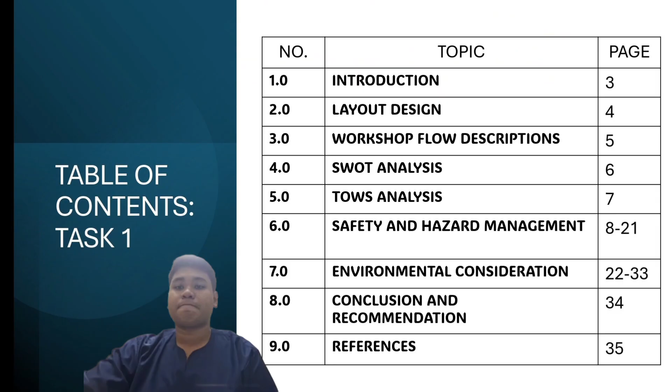So this is our table of content.

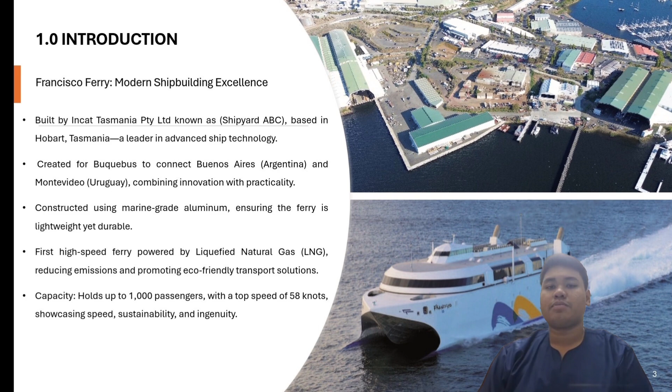For introduction, Francisco Ferry, a modern shipbuilding excellence built by Shipyard ABC in Tasmania, is innovative and efficient. It's powered by LNG, making it eco-friendly. It's also designed to connect Buenos Aires and Montevideo. It can carry up to 1,000 passengers and reach 58 knots.

Next is layout design. The shipyard layout is strategic to ensure smooth workflow. Each section, like the blasting and fabrication areas, is arranged for efficiency and safety.

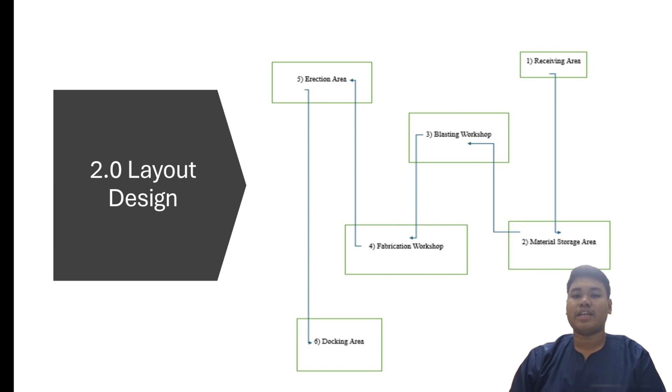Next, we move to workshop flow description. The shipyard workflow is divided into key areas. The first one is the blasting workshop, which is to clean metal for strength and safety. The second one is the fabrication workshop. It uses machines like cutters and welders for speed and accuracy, for example cutting shapes and weld methods.

Number 3 is the erection bay, which is for assembling large parts using cranes. And the last one is the docking area, which is the place for final testing and touch-ups before launch.

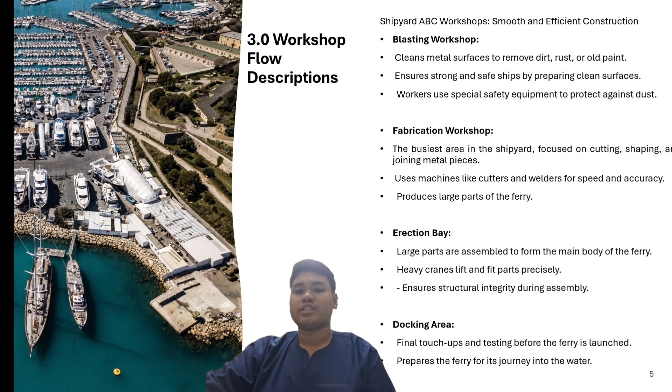We move to SWOT analysis 4.0. For strength, advanced technology like LNG powered ferries, and skilled workforce with efficient processes. For weakness, high initial cost for advanced equipment and dependency on specific skill level. For opportunity, growing demand for eco-friendly ships and potential for international collaboration. For threats, competition from global shipyards and stringent environmental regulations.

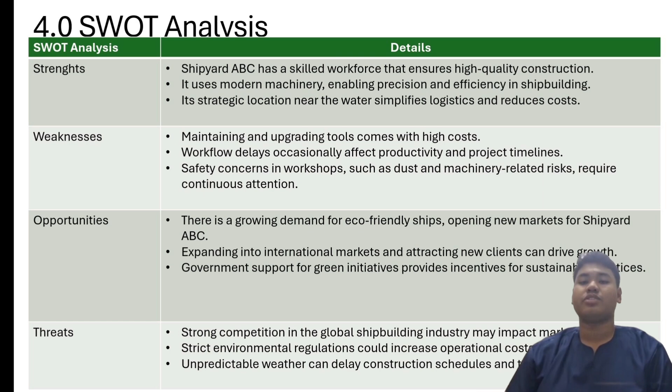Next is TOWS analysis. The first one is threats-opportunities: use advanced technology to tap into the eco-friendly ship market. Second one is strength-threat: leverage expertise to stay ahead of competition despite regulation.

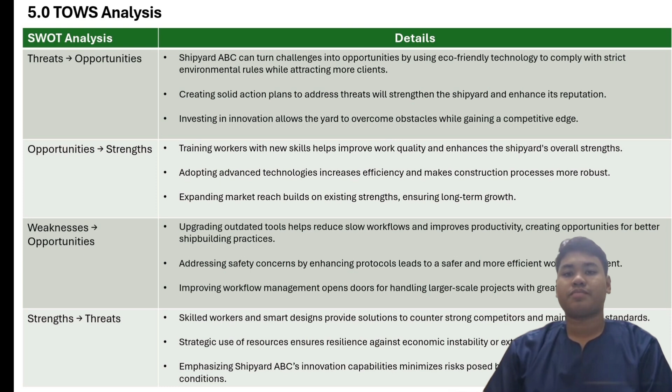Number 3 is weakness-opportunity: seek international funding to offset high costs. And the last one is strength-weakness: invest in training programs to reduce dependency on specific skill level.

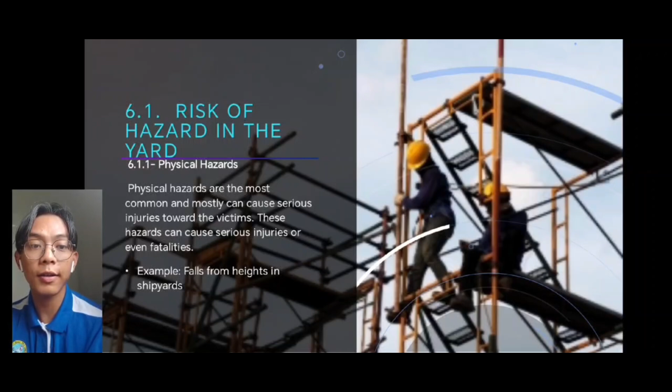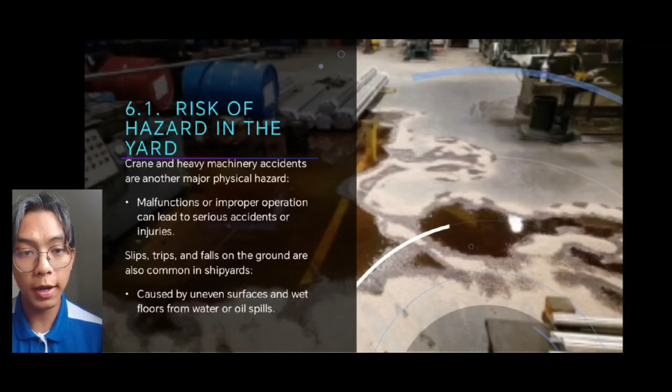The next one is slips, trips, and falls on the ground that can be caused by uneven surfaces and wet floors from water or oil spills.

Next one is chemical hazards. Chemical hazards in shipyards can cause immediate injuries, as an example burns and respiratory irritations, that can cause long-term health problems such as cancer and lung disease. Next is chemical risk that includes exposure to hazardous substances, as an example asbestos, solvents, welding fumes, and paint that contains lead or other toxic materials.

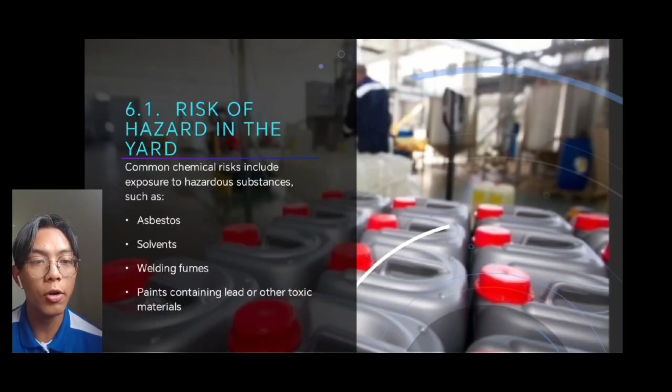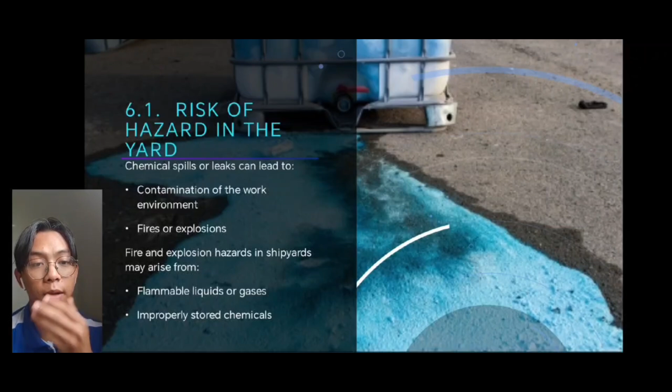Chemical spills or leaks can lead to contamination of the work environment or fire or explosion. Fire and explosion hazards could be caused by flammable liquids or gases, or improperly stored chemicals.

Biological hazards are less common but still pose health risks, including mold and fungi. Shipyards, as we know, handle wet materials, so that's how mold and fungi could be a risk of hazard in shipyards. The humid environment is also prone to biological growth, and these hazards could affect long-term exposure, which may include respiratory disorders and other chronic health issues.

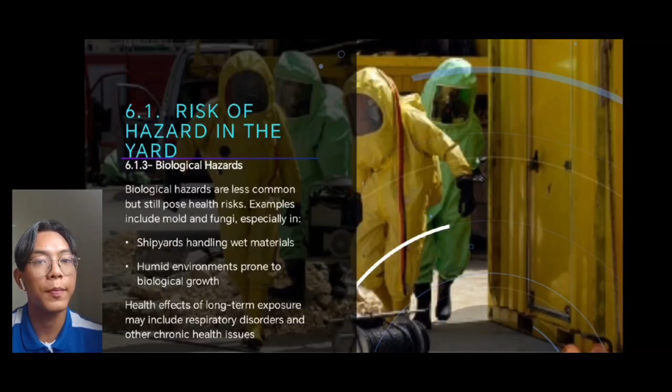For proper safety measures, use PPE. PPE is essential to minimize injury to workers. Workers are encouraged to wear hard hats, safety boots, safety glasses, and safety gloves. For chemical or fume exposure, workers should use respirators or face masks, which could help workers minimize the inhalation of hazardous substances and protect long-term health.

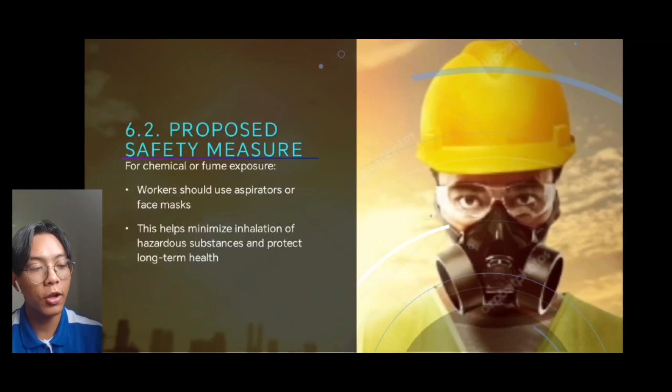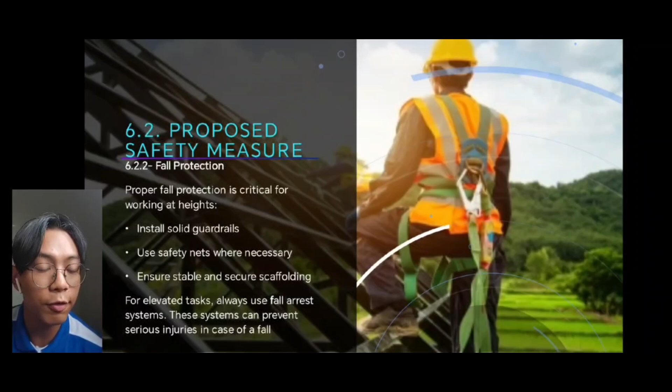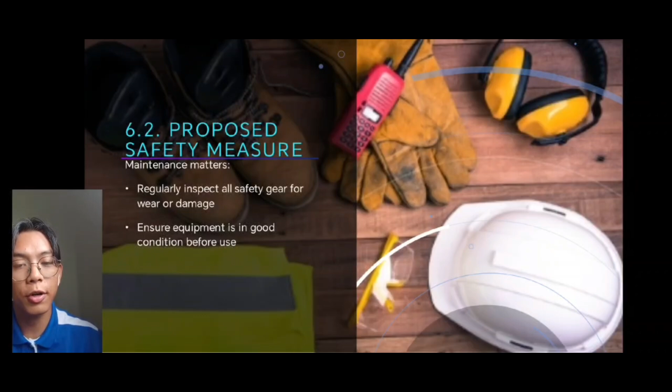For fall protection, companies should provide solid guardrails and safety nets where necessary, and ensure stable and secure scaffolding. For elevated tasks, workers should use a fall arrest system that can prevent serious injuries in case of falling from height. Maintenance matters should be done by regularly inspecting all safety gear for wear or damage, ensuring equipment is in good condition before being used by workers.

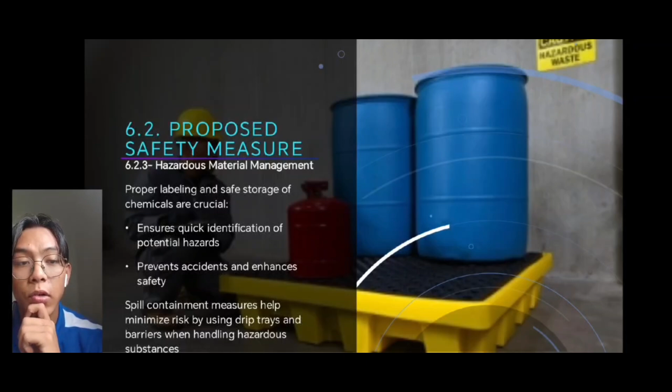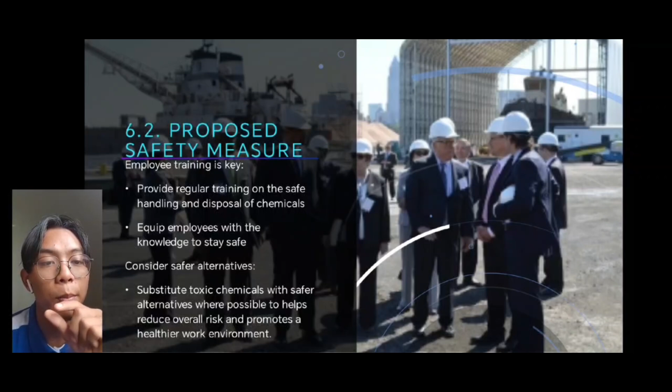Chemicals need to be properly labeled and stored safely to ensure quick identification of potential hazards and to prevent accidents and enhance safety. Spill containment measures help minimize risk by using drip trays and barriers when handling hazardous substances. Employee training is key, providing regular training on the safe handling and disposal of chemicals, giving knowledge to employees to stay safe in the working environment and consider safer alternatives. Substitute toxic chemicals with safer alternatives where possible to help reduce overall risk and promote a healthier work environment.

The next one is environmental consideration. For eco-friendly practices in ferry construction, the company should use sustainable materials, because it can support environmental responsibility and efficiency by using recyclable materials such as aluminium and eco-certified composites. They should also enhance resource efficiency in large-scale projects.

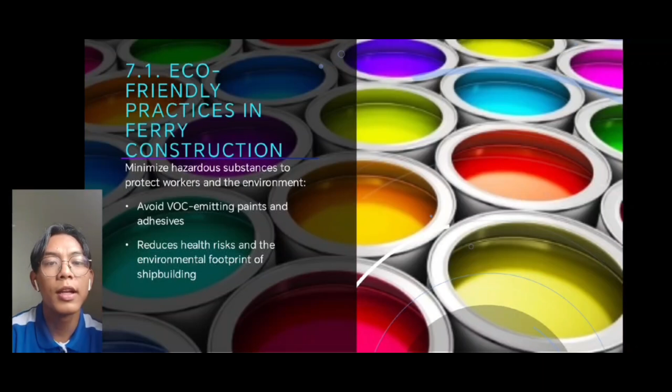For interior fittings, they should choose sustainably sourced wood to promote responsible material choices. They also need to minimize hazardous substances to protect workers and the environment, avoiding VOC emitting paints and adhesives to reduce health risks and the environmental footprint of shipbuilding. By maintaining eco-conscious shipyard practices, they can transition to renewable energy sources in the shipyard.

For example, use solar or wind power to reduce carbon footprint and to promote material recycling and reuse. This also can help cut down on waste, which conserves valuable resources during construction.

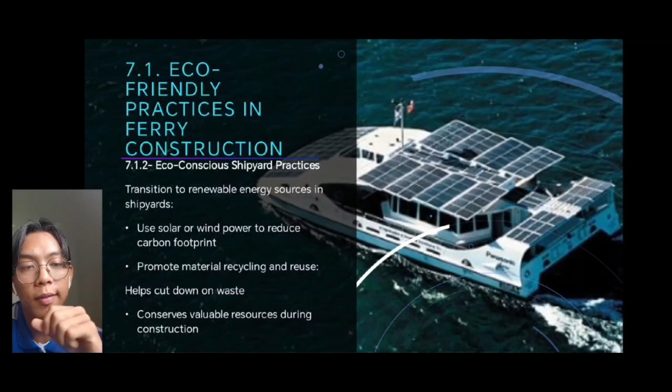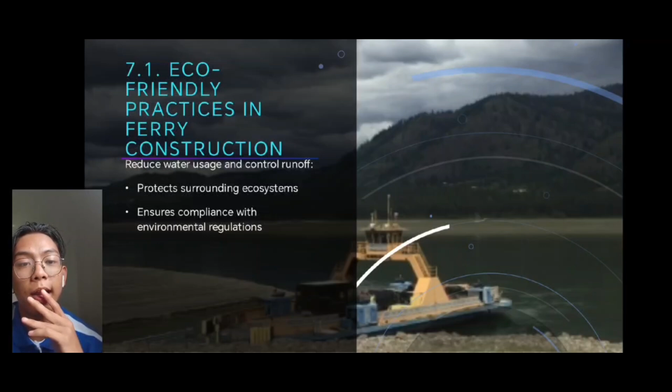They also can reduce water usage and control runoff to protect the surrounding ecosystem, mainly the marine ecosystem, and to ensure compliance with environmental regulations.

Next, use eco-friendly coatings and anti-fouling paints to prevent marine pollution through safer materials, which are non-toxic, biocide-free hull coatings to protect the marine ecosystem. They can also choose low-impact paints to support sustainability goals and make vessels more eco-friendly over their lifetime.

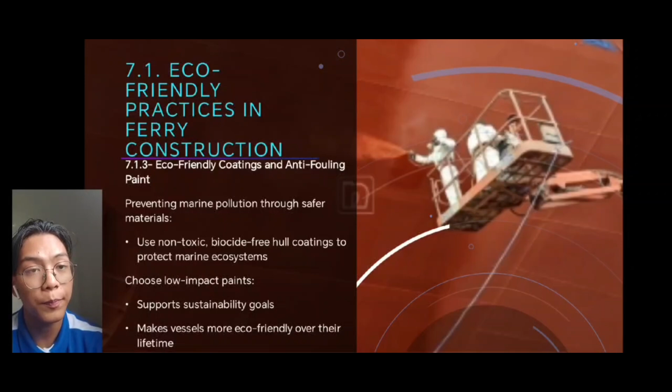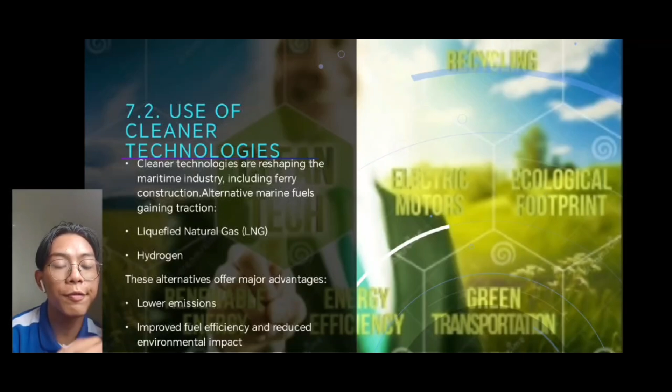They should also use cleaner technologies reshaping the maritime industry, including ferry construction. The alternative marine fuels gaining traction are LNG and hydrogen, and these alternatives offer major advantages like lower emissions, improved fuel efficiency, and reduced environmental impact.

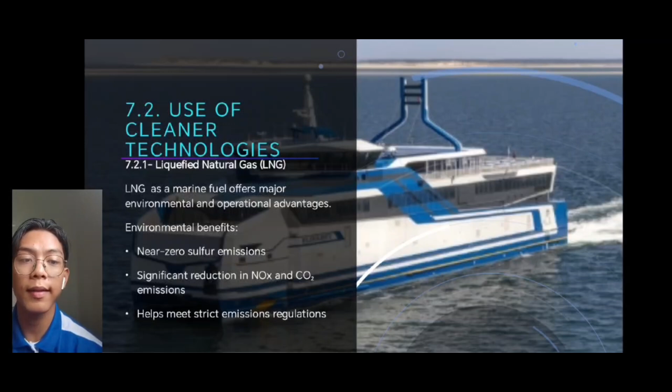By using LNG, liquefied natural gas, as a marine fuel, it offers major environmental and operational advantages. What are the environmental benefits? Some of them are near-zero sulfur emissions, significant reduction in NOx and CO2 emissions, and it helps meet strict emissions regulations.

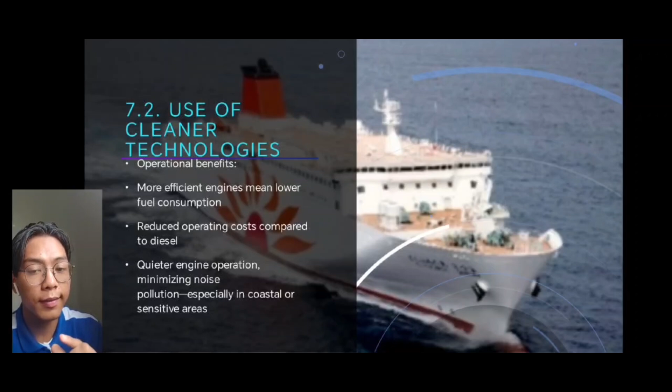The operational benefits are more efficient engines meaning lower fuel consumption. This can cut operational costs during the sail of the vessel compared to diesel. Next is quieter engine operation that could minimize noise pollution, especially in coastal or sensitive areas such as residential areas nearby the coastal zones.

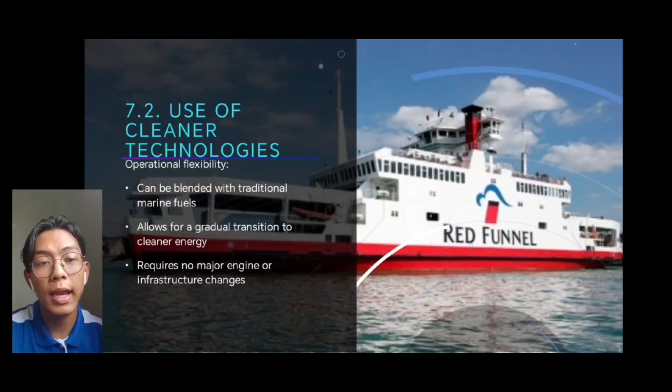Next is biofuels. Biofuels are a sustainable alternative to traditional marine fuels, derived from organic sources like plants, waste oils, agricultural residues, or algae. The advantages of using biofuels are that they are considered carbon neutral and can reduce reliance on fossil fuels. For operational flexibility, it could be blended with traditional marine fuels, allowing for a gradual transition to clean energy, and requires no major engine or infrastructure changes on the vessel.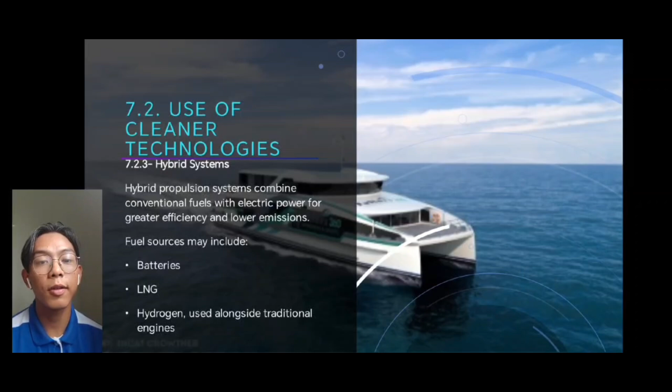The hybrid propulsion system combines conventional fuels with electric power, creating greater efficiency and lower emissions. The fuel sources may include batteries, LNG, and hydrogen used alongside traditional engines. So what are the key benefits of hybrid ferries?

The key benefits of hybrid ferries are improved fuel efficiency across different operating conditions, lower emission of CO2, NOx, and particulate matter, and for operational flexibility, it can switch between electric and fuel modes based on routes or restrictions.

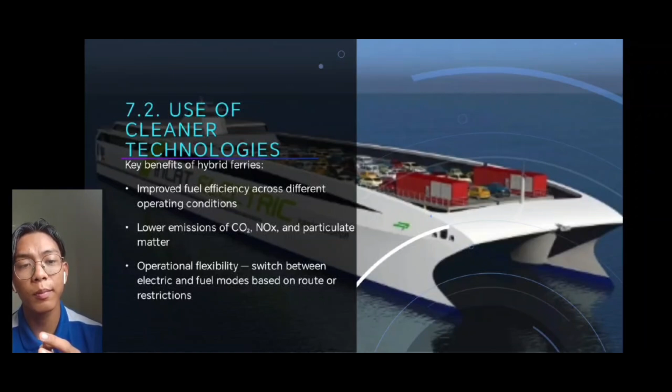Lastly, for the conclusion and recommendations: first, efficient facilities. Each workshop plays an important role in ensuring fast and high quality shipbuilding. Next, strong fabrication, such as cutting, welding, shaping, and inspection, should create safe and durable ship structures using steel and aluminium.

For smooth logistics, safe storage, easy movement of ship parts with cranes, and a quick tracking system keep everything organized. And for strategic locations, the shipyard should be near the sea to allow the ship to easily transfer to outfitting berths and direct water testing.

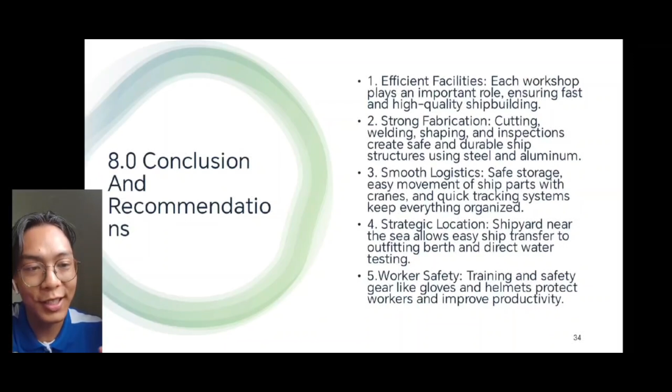And the last one is worker safety. Workers should get proper training and safety gear such as gloves, helmets, and so on to protect workers and improve productivity. So that's all, thank you.

So we move to task 2, about Shipyard ABC. Shipyard ABC is a well-organized shipyard. It focuses on safety and quality in shipbuilding. Materials like steel and aluminium are checked, cleaned, and shaped. These parts are then assembled and tested to ensure the ship performs well in water.

Shipyard ABC has 5 key areas. The first is the receiving area, where materials like steel and aluminium are inspected and stored safely. Number 2 is the blasting workshop, which cleans metal surfaces to make them stronger and safer.

The third is the fabrication workshop, which shapes and joins metal to create ship parts. Number 4 is the erection bay, which assembles large parts using cranes. And the last one is the outfitting berth, where engines, wiring and interiors are installed, followed by water testing.

The next slide is about the workshop flow. The work process is clear and efficient. Materials arrive, are cleaned in the blasting workshop, shaped in the fabrication workshop, assembled in the erection bay, and completed with outfitting and testing before delivery.

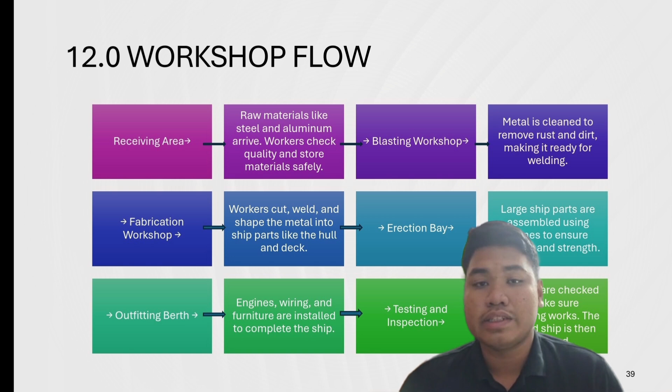The next slide is about material use. The shipyard uses high quality materials like aluminium for lightweight design, steel for strong structure, composite for durability, and LNG tanks for clean energy solutions.

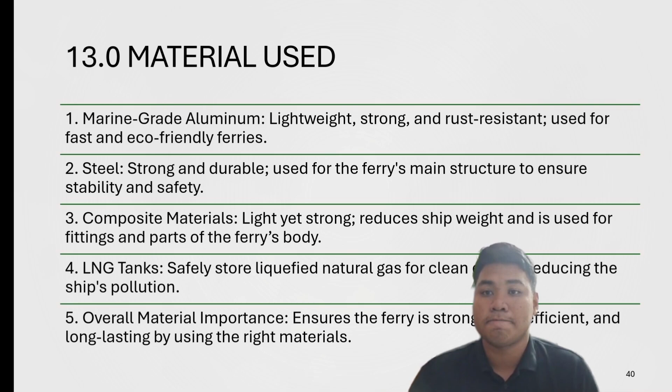Let's move to the topic of fabrication. Fabrication is a busy and vital process. Here metal is cut, welded and shaped into parts. Quality control ensures each part is strong and reliable for the final ship.

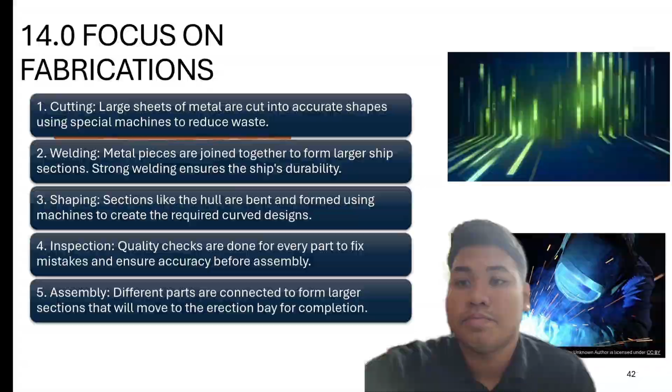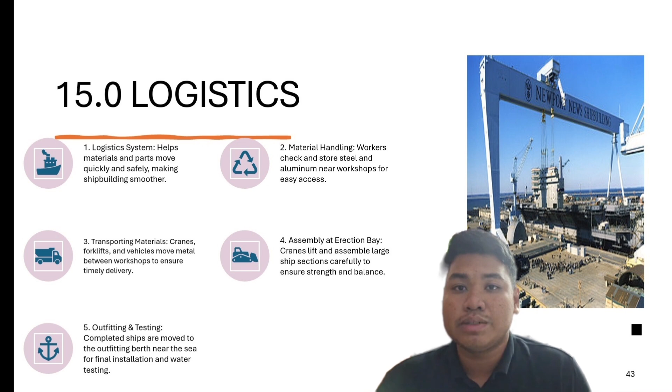Next we move to logistics. Logistics keeps the shipyard running smoothly. Materials are stored safely and large ship parts are moved efficiently using cranes, and this organized system helps complete projects on time. Now we move to the conclusion.

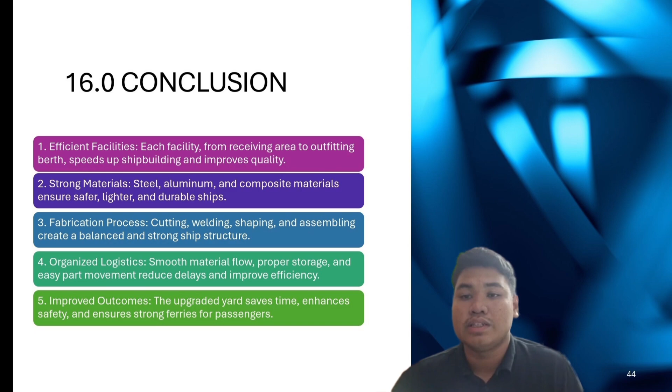To sum up, Shipyard ABC is a smart and efficient shipyard. Its process ensures high quality ships, prioritizing safety, durability and sustainability. Thank you, and this is our reference, thank you very much everyone for listening.